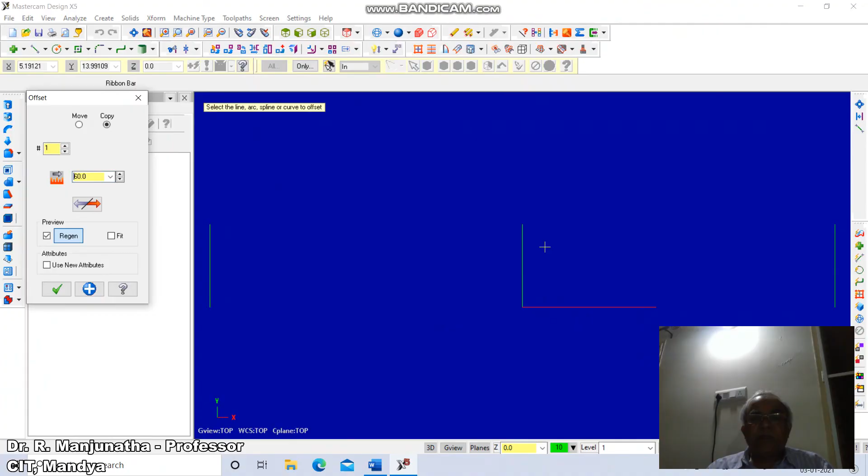Then on this side is 120, so we are going to have offset. So take the offset distance as 60. So from here 60 and also from here it is 60. Then go to fit it and then click. Then extend these lines till here.

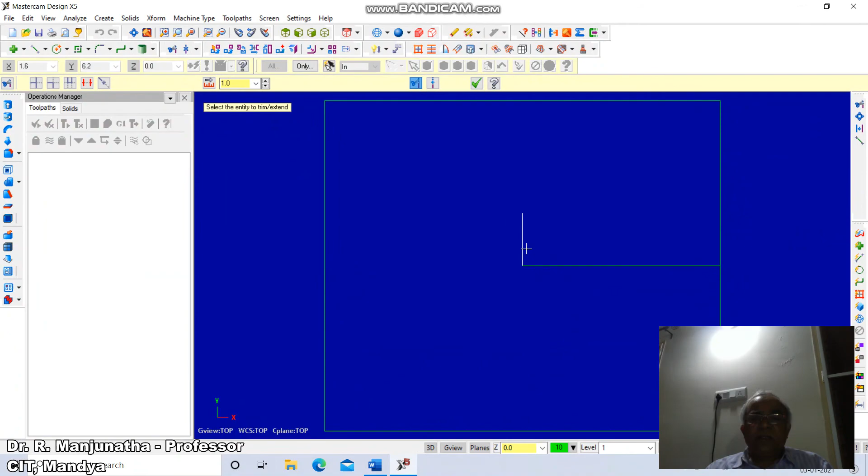Now from here we have the offset distance which is 20 on one side. So go to Xform, go to offset, take the distance as 20 on this side. Then we have 10 mm on this side, so go to offset, take the distance as 10. So from here it is 10. So from here it is 100. So go to Xform, offset, take the distance as 100.

Then there is 10 mm offset from this side, which is exactly at the center point, which is at 70 mm. So the center point line is already here. So go to offset, take the distance as 10. Then go to line command, draw a line from intersection to this end point, and then from here to here. Then trim this line till here, trim this line till here. Then you delete this line and this line entirely.

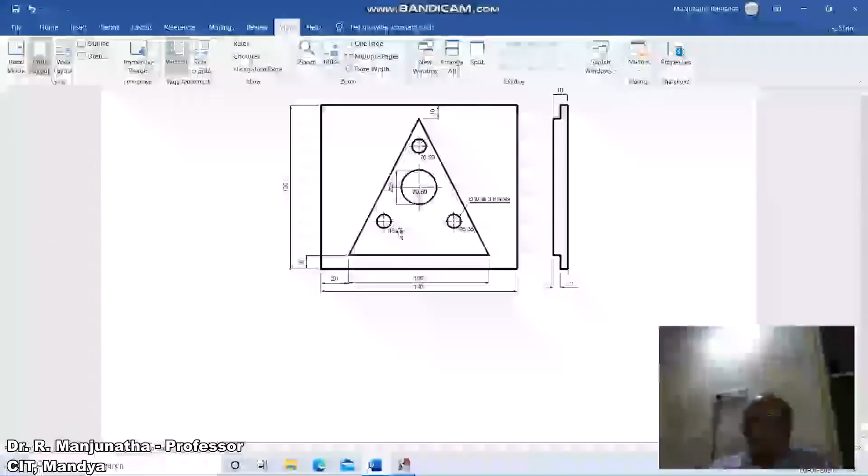Then we want to have the center point which is diameter of 25. So go to circle, take this end point and diameter is 25, you create that circle. Then 45 by 30, so you go to Xform, offset, take the distance as 45. Then 30 mm from here. So go to offset, take the distance as 30 from this direction and also 95. So again offset, you take 95 from here.

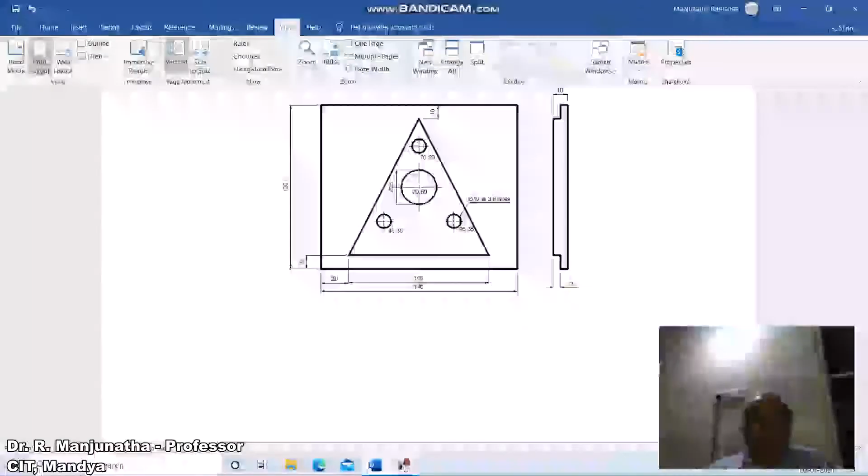Then we have 70 by 90. 70 is already there, so we take 90 from here. Then draw a circle of diameter 10 at 3 places. So go to circle, take this intersection point, diameter is 10. Then again take this diameter as 10 and again 10. Now we have completed all the profile.

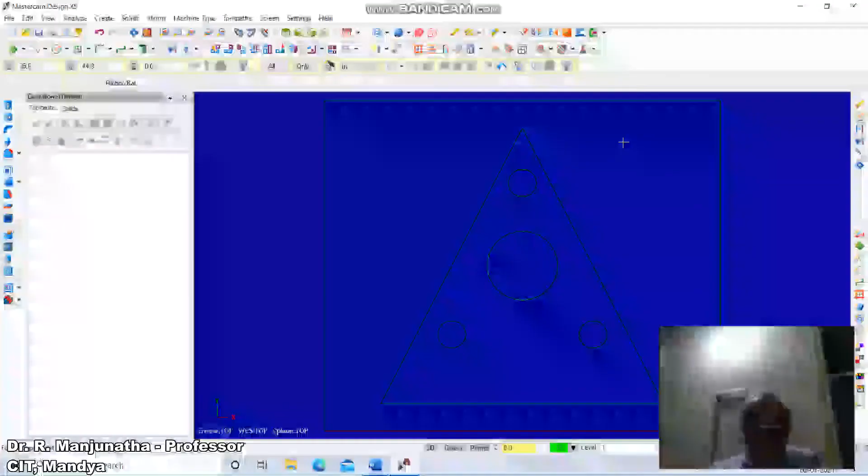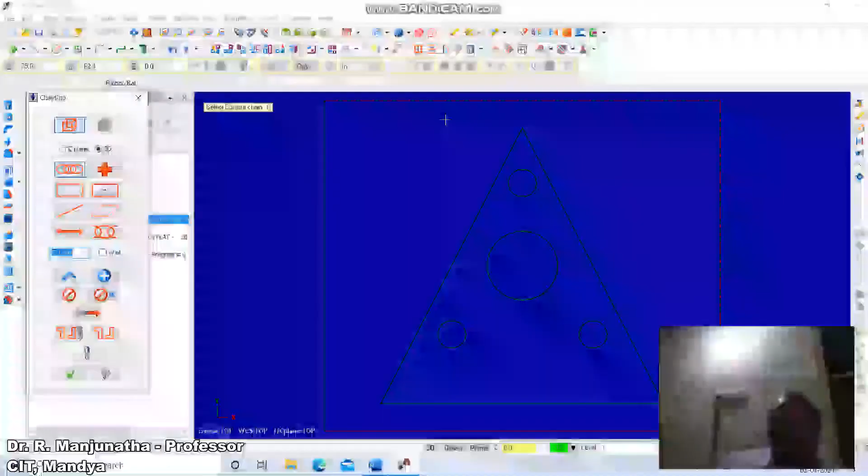Then we erase this line, this and this. Now we will go for the machining. Click on tool paths, click on 2D high speed, click on chain, click on outside, select contour, click on the 140 mm horizontal line, and select contour 2, click on the 100 mm horizontal line. Since it is outside machining, it will take the outside. Click on right tick to clear the dialog box.

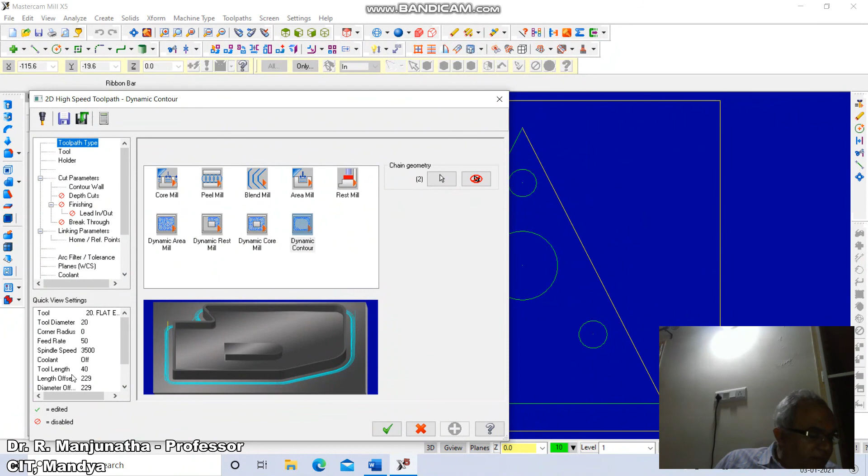In the dynamic contour dialog, select dynamic core mill, click on linking parameters, enter the depth value as -5, click on tool, click on select library tool, select 5 mm bull end mill, number 120, click on OK, click on right tick to clear the dialog box. So now this machining will take place.

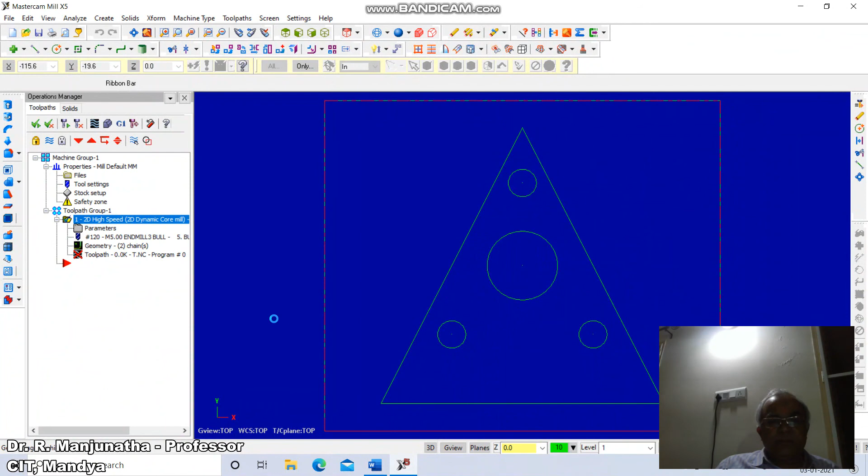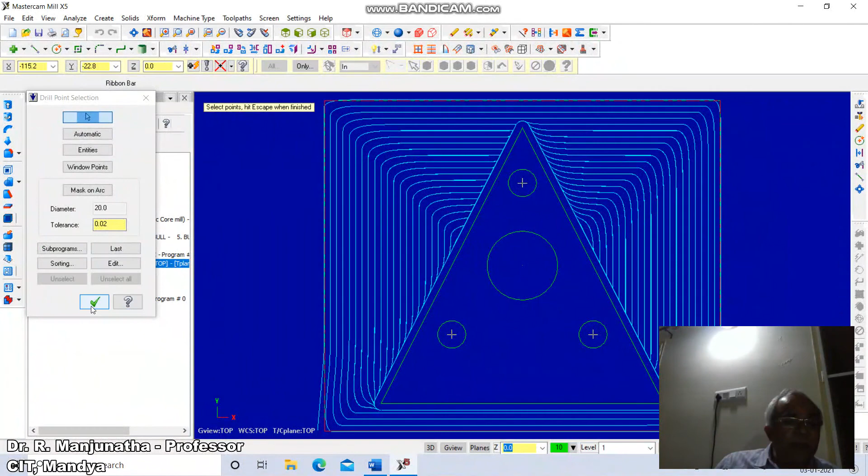Then click on tool paths, click on drill, select the points of the 10 mm drill, click on right tick, then the 2D toolpath dialog box will appear. Click on tool, select library tool, tool of diameter 10, click on right tick, click on linking parameters, enter the depth value as -15, then click on right tick, so the drilling operation takes place.

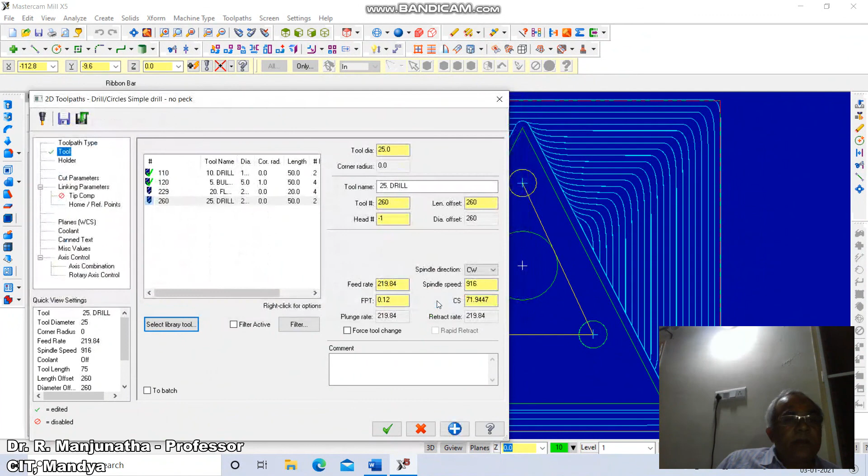Then again click on tool paths, click on drill, select the drill position as the center point of this, click on tool, select library tool, drill number 260, that is the 25 mm drill, click on OK, click on linking parameters, enter the depth value as -20, then click on right tick, so that hole will be drilled.

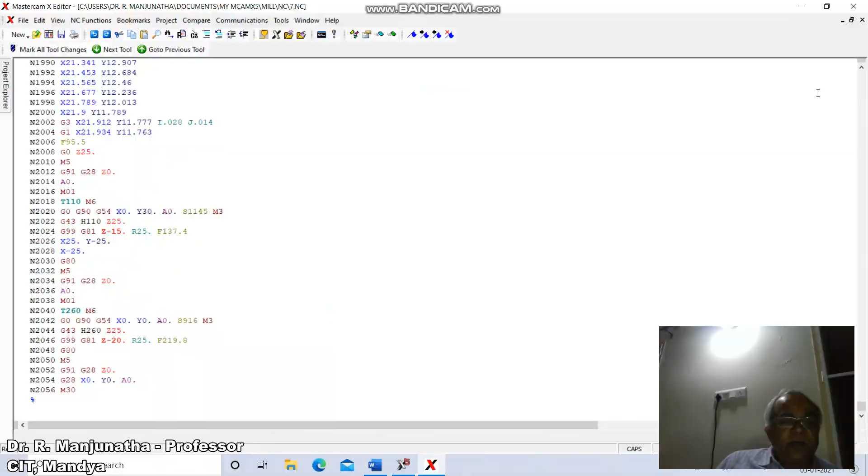Now we click on the machining, so the simulation takes place. Since we have given only 5 mm depth, the machining will be done to 5 mm depth on the outer profile. Since you have selected outside, the machining is taking place on the outside. Then we are going to have the triangular shape. Now the triangular portion machining is taking place.

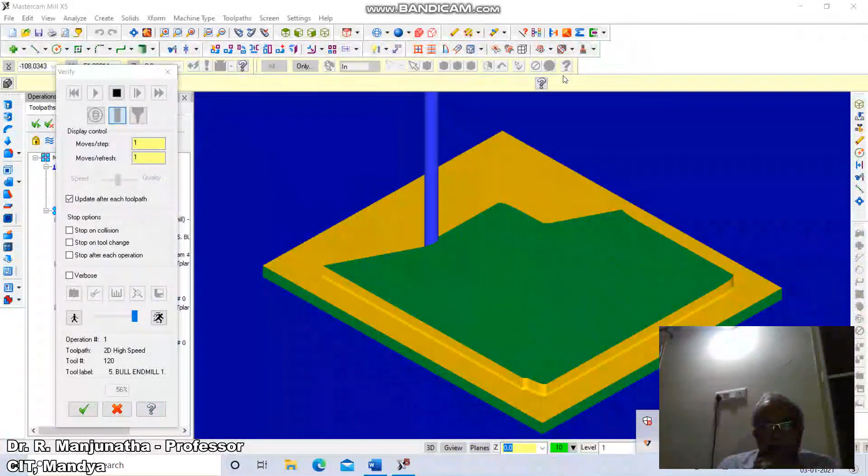So now one side of the triangular profile has been machined. Now we will go for the second operation.

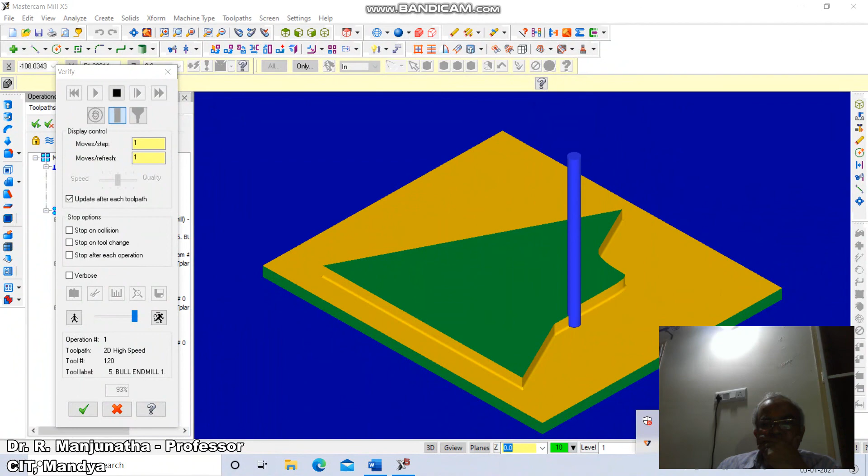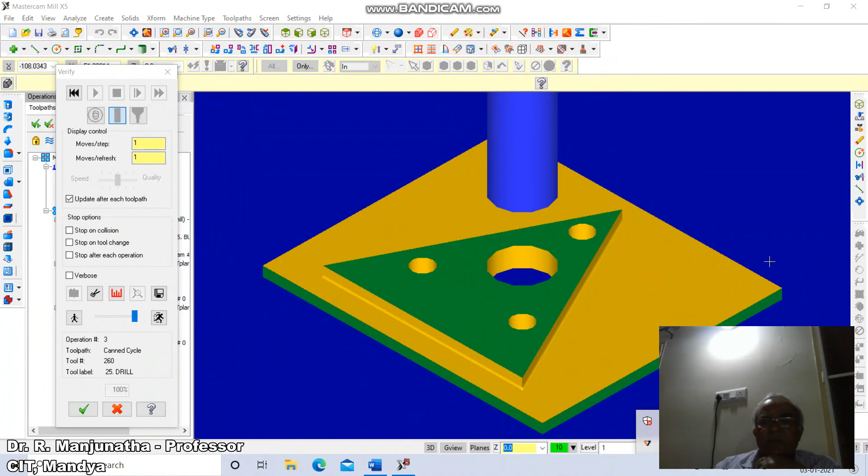Then we have a 10 mm drill at 3 places and 25 mm drill at the last one. So this is how the machining can be done. The simulation of the actual component can...